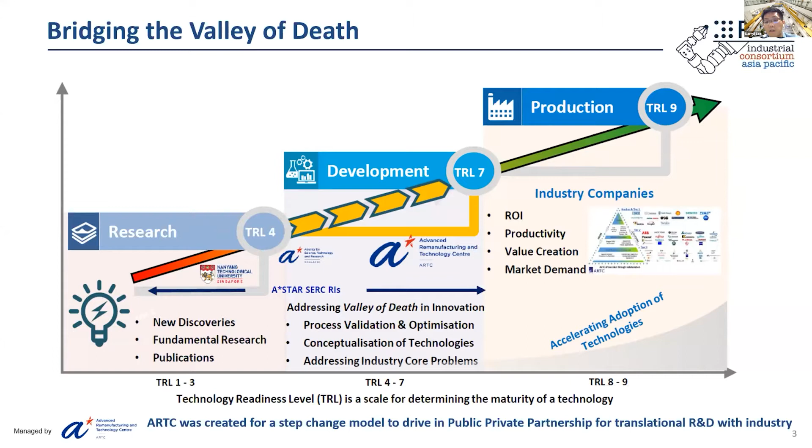So next up, I'd like to give an introduction about Focused Technical Projects, FTPs, for those not really aware about this. FTPs are used to drive members' needs by co-development and creating new ROS-based platform technologies and enablers. This can be achieved by lowering the required investment by cost sharing between members. The solution developed will be contributed back to the open source community, and this allows members to steer the direction of the de facto standardization of ROS.

It helps to accelerate the organic growth of ROS platform development through faster creation of future open source capabilities made by others, which are leveraged back by the consortium members free of charge to create future solutions. This helps in proliferating ROS platform components to achieve industrial grade quality faster for adoption. So recently, we went through an FTP roadmap generation through the use of a survey.

The survey is to elicit the common problem statements and needs from members to craft out work streams of future FTP topics, where co-development between members can take place. And I will be sharing more about this in the later slides.

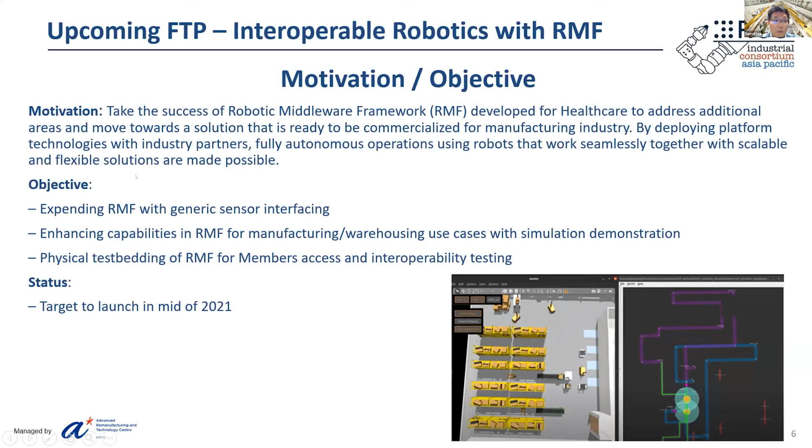So, as communicated earlier, early this year we performed a survey to elicit the common problem statements and challenges in industrial robotic applications, to find synergy on potential FTP roadmap creation. 15 of our consortium members participated. In summary, based on the results, interoperability in RMF has the highest vote. And since that FTP has been set in place, we identified that mobile manipulation could be the next FTP topic.

The survey also showed insights on the challenges faced when deploying robotic solutions in industrial applications. Some of the challenges are high hardware costs and complexity in setting up sensor fusion, and so forth. So this may be taken into consideration when we curate future FTPs. We can look at greater details in the following slides.

So we have separated the robotic challenges into different applications, namely machine vision, the usage of robotic arms, the usefulness of simulation, as well as mobile manipulation. For machine vision, the most prominent issue faced is the setup of complex sensor fusion to achieve useful performance, and this usually results in higher hardware costs and longer setup time.

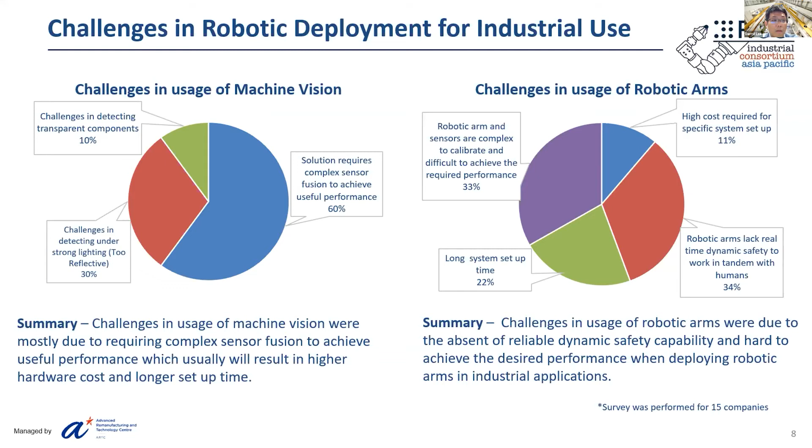So in challenges in leveraging simulation tests, we found that due to reality gaps, complex simulators, and difficulty in replicating environment constructions, this often results in limited test scenarios, thus hindering the full benefits of having such a simulation. And lastly, in autonomous mobile robots and autonomous guided vehicles, when deploying them, we find that it is complicated to achieve the desired reliability, as well as security-related issues such as tailgating and remote hacking, just to name a few.

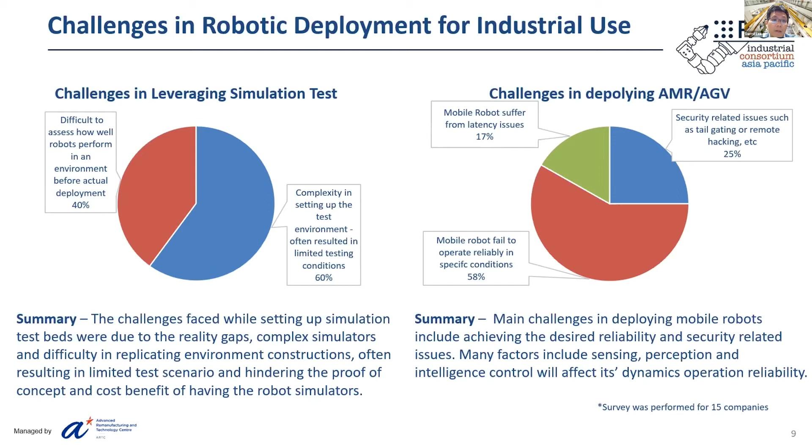So maybe some explanation on this. For easy perception deployment, EPD, we are looking at a package that takes care of object detection, classification, tracking, and accurate positioning modules. For easy manipulation deployment, we are looking at a flexible, fast grasping library for multiple types of manipulators, especially with integrated collision avoidance capability.

So we have conducted this training with 30 participants from 7 companies, and we have provided them with in-depth technical explanation of the working principle for each package. We also took the opportunity to acquire valuable feedback from them when they are deploying their robotic solutions, and some of the potential use cases that we have identified are mobile manipulators, depalletizing, easy pick and place configuration setup in manufacturing sites as well as FMCG warehouses. So with this, I would like to pass on to Glenn to share more about his developmental work on easy robotic vision manipulation using EPD and EMD.

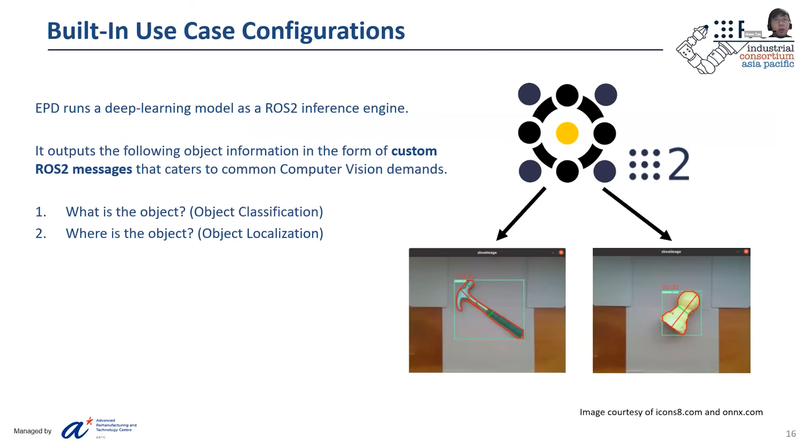EPD is also highly customizable with 3 precision levels that each have their own trade-offs, but are useful for tailoring to your specific needs. The precision level determines the speed as well as the level of detail of computer vision provided. As you can see in the table, precision can be set from the lowest level of 1, where the model only identifies the presence and identity of objects in the scene, to precision level 2, which provides the bounding box, and lastly level 3, providing the segmented image mask of the detected objects in the scene. For robotic tasks, precision level 3 has been identified as the most commonly selected level due to the amount of detail provided in the output.

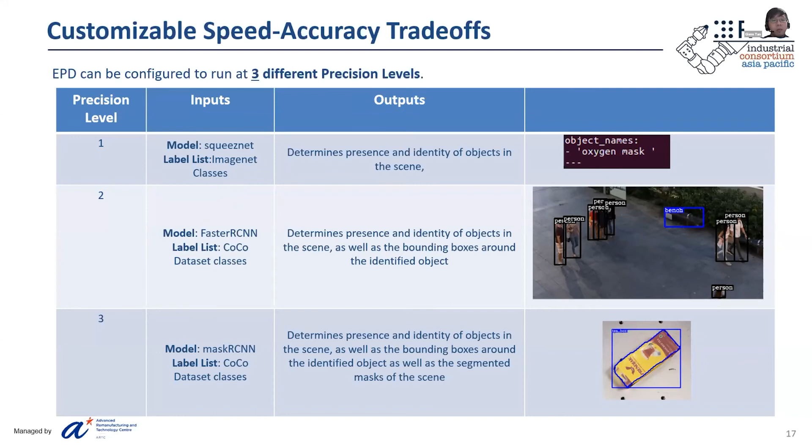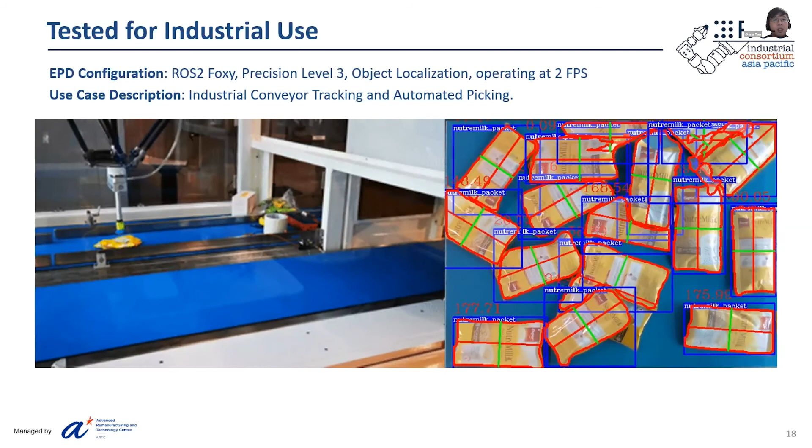Beta testing of the Easy Perception Deployment package has already started on commercial industrial projects, like what you see here. Using the precision level 3 object localization use case and operating at 2 frames per second on a mid-tier NVIDIA GPU, we were able to verify EPD's use for an industrial conveyor tracking and automated picking task in ROS2 Foxy.

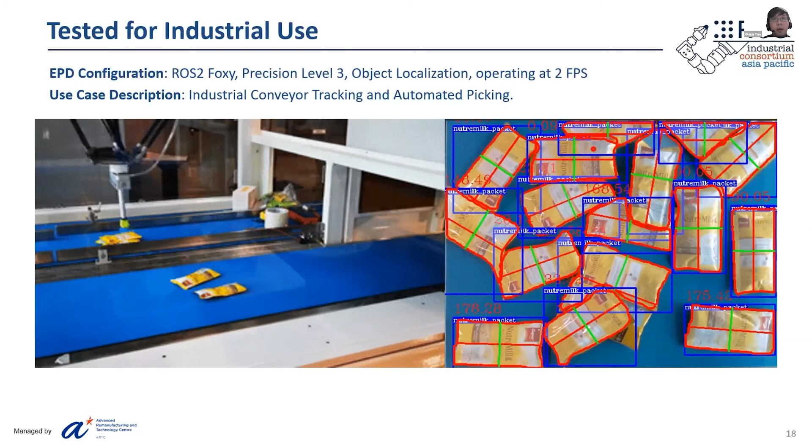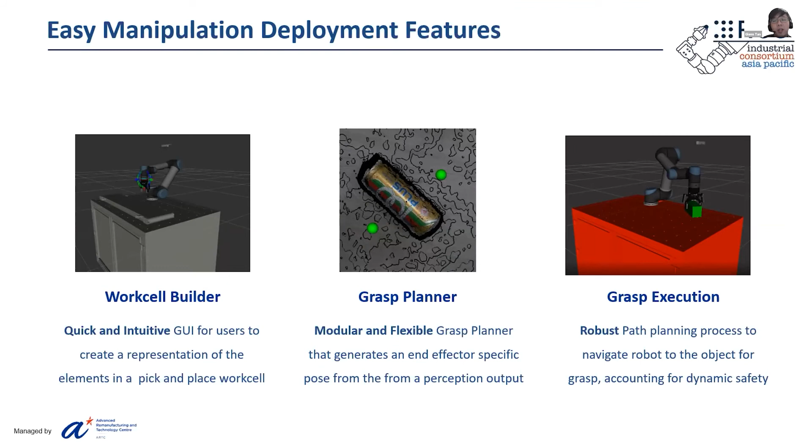So next, we'll look at the Easy Manipulation Deployment ROS2 package. This package aims to provide a user-friendly, modular, and configurable manipulation pipeline for pick-and-place tasks. EMD consists of 3 main features: the Workcell Builder, which facilitates the generation of a pick-and-place scene representation; the Grasp Planner, a highly modular and flexible planner that provides the optimal end effector pose to grasp an object; and a grasp execution component that currently uses MoveIt to navigate to the pick object while dynamically accounting for safety. Each of these components aims to reduce the steep learning curve that users new to both programming and ROS may face when integrating an automatic pick and place system into their tasks.

For the Workcell Builder portion of EMD, it is meant to provide an easy way to create a simple pick and place scene. This is done through automatic generation of pick and place workcell description packages, complete with the combined URDF and SRDF of the manipulator and end effector, as well as creating simple static object description packages. These features are provided using a graphical user interface which adheres to the URDF format provided by the documentation, while removing the need for users to understand the syntax and the location of where to put certain files inside the workspace.

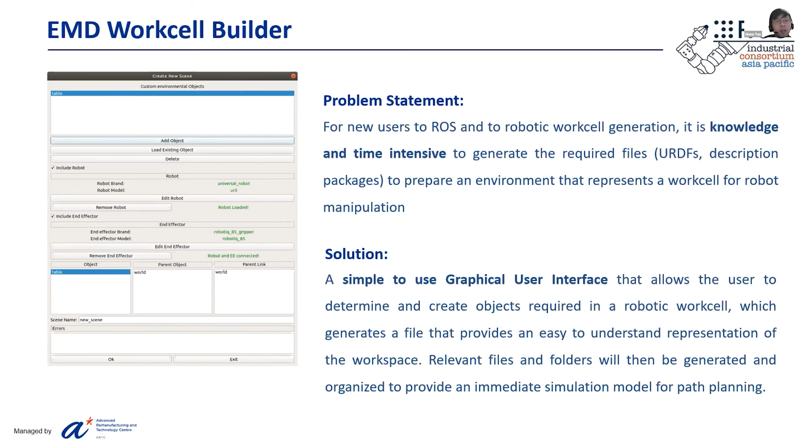For the grasp planner itself, it was designed to provide an alternative to deep learning grasp planning approaches, which, while accurate, require users to label huge amounts of data to increase accuracy, especially for unique objects which existing datasets may not be comprehensive enough to cover. Furthermore, these existing datasets are limited to two-finger representation of a specific width, which creates another problem of having to relabel data with different representations depending on the dimensions and type of end effectors being used.

This grasp planner aims to address this by providing an algorithmic depth-based approach that uses point cloud information to determine the grasp poses, while at the same time accounting for finger collision as well as stability. This helps eliminate any need for training on object data at all, and makes it a lot easier to switch between end effectors for different pick and place situations.

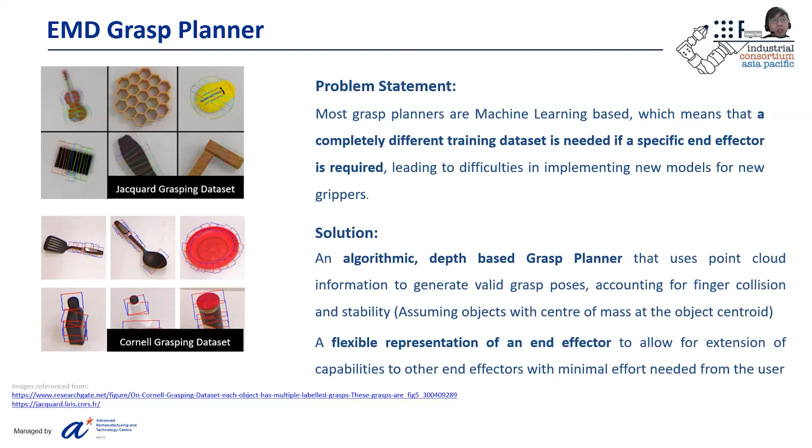As you can see, these are some of the grasp plans generated by the EMD grasp planner. For finger grippers, the grasp planner first does finger collision checking for the gripper in its open configuration using the flexible collision library, to ensure that the gripper does not collide with the environment.

Next, gripper contact point ranking is done, where the contact points of each of the fingers are passed through a ranking algorithm to determine the quality of grasp, with attributes such as surface curvature, antipodal grasp angles, as well as distance from the centroid of objects. For the suction gripper, a similar ranking algorithm is used, with the additional attribute of surface contact points.

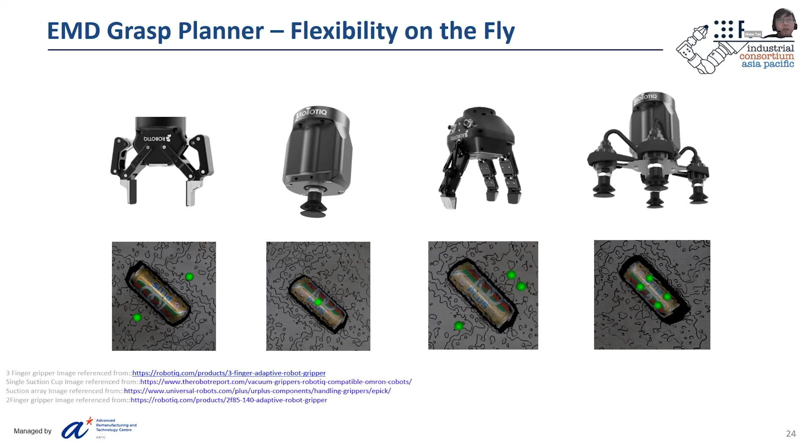These end effector grasp plans generated can be easily switched between each other using a very simple configuration file, which we will look at in the next slide.

Lastly, we look at the grasp execution component, which involves integrating dynamic collision checking during trajectory execution. This is currently demonstrated with the scenario shown, where a moving collision object enters the pick and place scene, simulated by remote jogging of one of the robot arms.

The dynamic collision checking can be split into four steps. First, the joint state of the arms are updated, then the future states of the collision object based on its current trajectory are calculated to check if there's any point of collision with the picking robot's trajectory. Next, depending on where the collision occurs with respect to the picking robot's trajectory, the robot reacts based on the safety zone we have designed, which we will explain in the next slide.

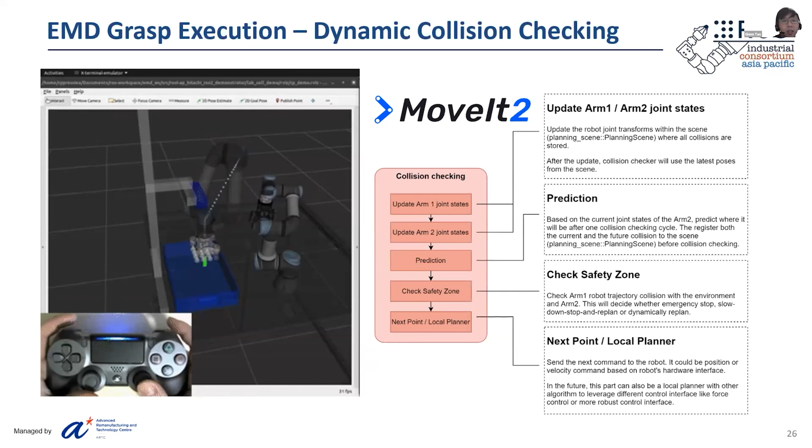The way the grasp execution component reacts to a new collision object detected in the scene depends on the part of the safety zone where the collision is detected. It is considered in the blind zone if the collision is detected too near the robot, such that a complete collision check cannot even be completed. The emergency zone is defined when a collision detection occurs after the first collision check iteration, but is still not far away enough that there is time to slow down and stop safely. When collision is detected inside both the blind and emergency zones, the robot will stop immediately.

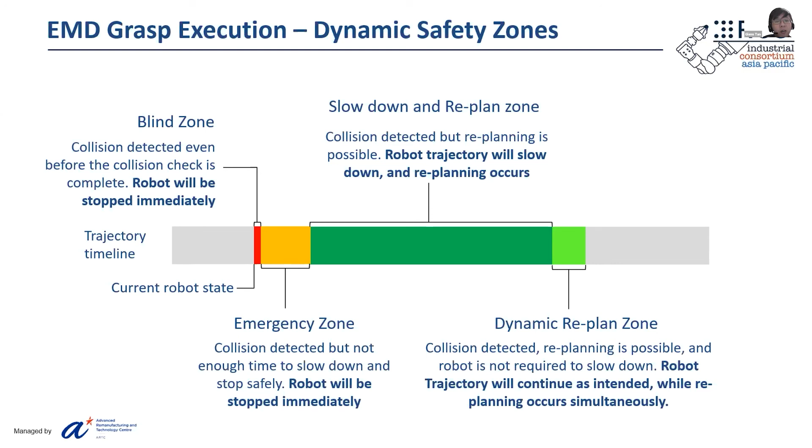The next two zones, the slowdown and replan zone, as well as the dynamic replan zone, allow the robot to continue its trajectory while doing replanning. But depending on how far ahead the collision is, the robot may or may not slow down the current trajectory during the replanning action.